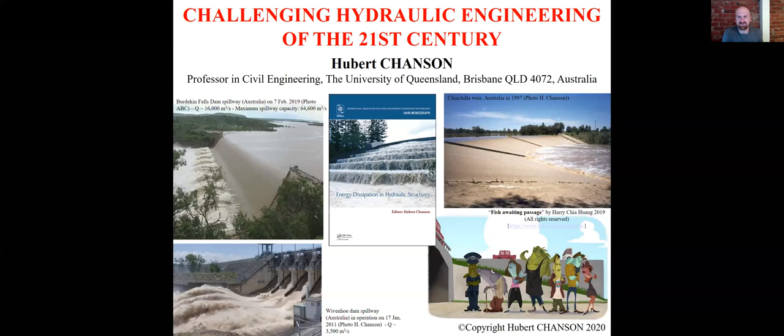This talk has three parts. I will introduce myself and share a few comments about my career, which might be relevant to early career researchers. Then I'm going to talk about what I'm passionate about, hydraulic engineering, and why I'm interested in it. Later, David and Sean will moderate the discussion.

As David mentioned at the beginning, I work in a school of civil engineering, and within the Australasian Fluid Mechanics Society, I think only about 10 to 15% of the membership work in civil engineering. In civil engineering, fluid mechanics is typically applied to water engineering problems. At UQ, in the School of Civil Engineering, our teaching includes hydraulics, fluid mechanics, and hydrology.

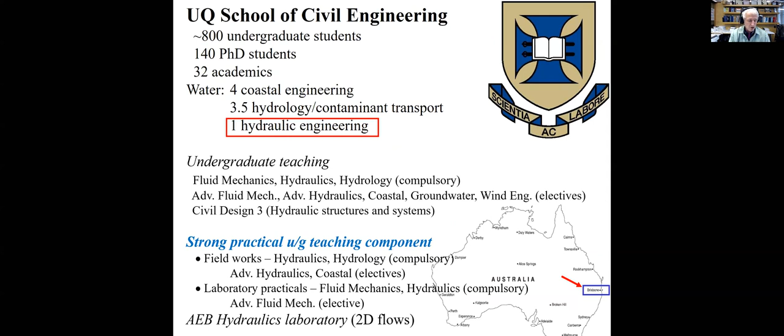A key feature of our teaching of water engineering is a very strong practical component, with fieldwork in two compulsory courses and two advanced electives, and also laboratory practicals in some of our compulsory courses. This is possible thanks to a relatively large and dynamic hydraulics laboratory, which is, in my opinion, the largest teaching and research hydraulics laboratory in the Southern Hemisphere.

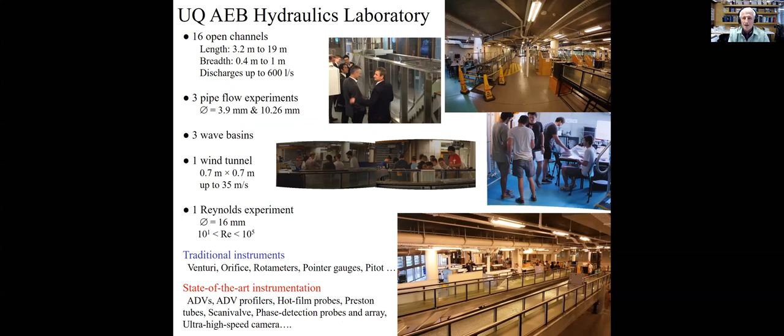I joined the University of Queensland about 30 years ago, after working for nearly 6 years in industry. My research interests include environmental fluid mechanics, hydraulic structures, and two-phase flow. As an academic, my workload is 40-40-20, meaning it should be shared between 40% teaching, 40% research, and 20% service and administration.

That sometimes surprises people, considering that I have published, authored, or edited over 20 books, including some of them that you should see in front of you. In the next four or five slides, I would like to share some experience in relation to research and services.

Administration and services include voluntary contribution to learned societies and peer review. I've been able to contribute to 3 learned societies over the last 28 years, which may include meetings, technical discussions, technical workshops, and organization of conferences, including the forthcoming Australasian Fluid Mechanics Conference in Brisbane at the end of this year.

Peer review is also a necessity in our profession. In the last 15 years, I've been involved as an expert reviewer for over 80 journals. I would like to take this opportunity to encourage early career researchers, but also mid-career researchers, to become more involved in learned societies and in the peer review process.

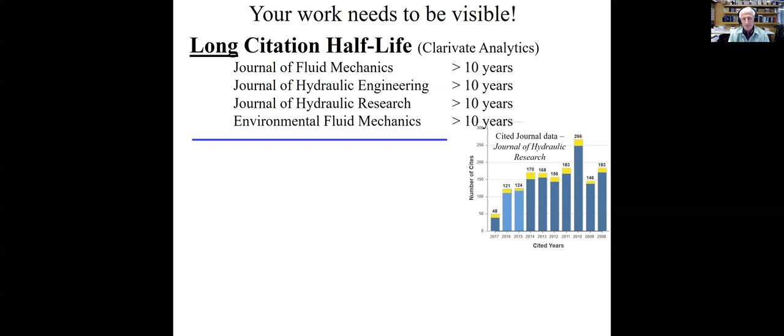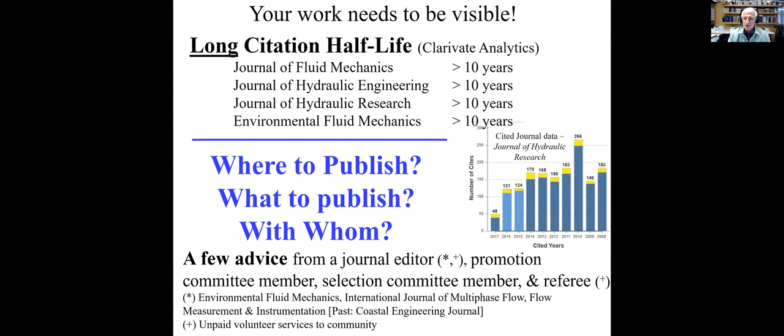So in the next four slides, I'm going to share my own experience, based on data from my own publication record, on where to publish, what to publish, and with whom to publish. First, let's talk about where to publish.

We need, of course, to talk about the IF, the impact factor, or what I like to call it, the insidious fudge factor.

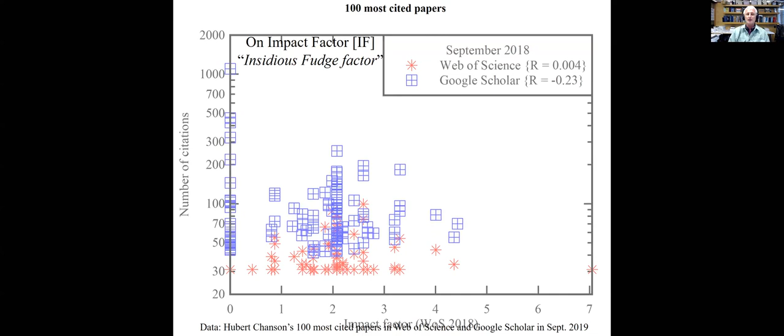If I look at my publication record, I have over 1,200 papers in Google Scholar and around 500 to 600 papers in Scopus and Web of Science. For the next few slides, I'll focus on the 100 most cited papers of my own publication record. This graph shows the number of citations of these 100 most cited papers as a function of the impact factor of the place where they were published, Web of Science and Google Scholar.

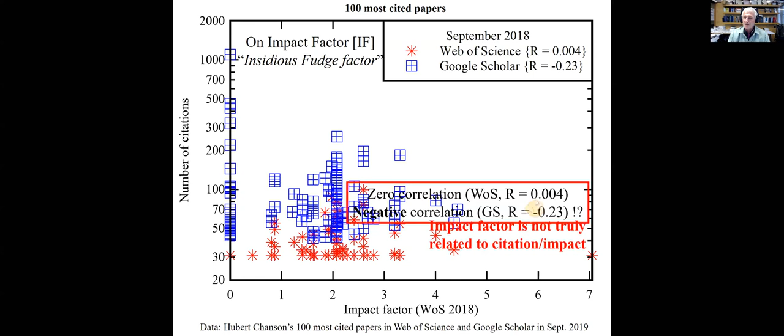What you see in front of you is a nebulous cloud. And if one were to do a regression analysis, there is zero or negative correlation.

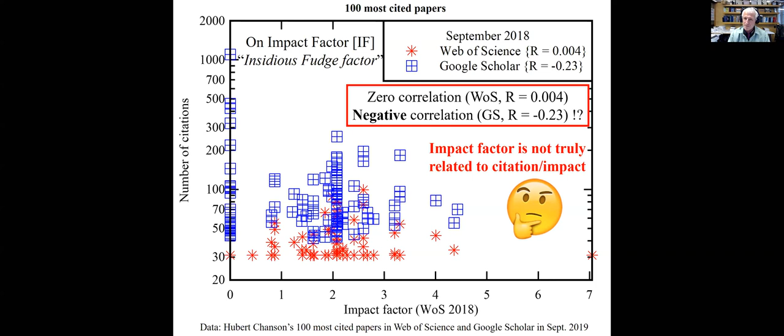Simply, the impact factor is not really relevant to early career researchers because it has been well acknowledged in the bibliometric bibliography that the impact factor is biased. This is clearly acknowledged by Clarivate Analytics, which manages Web of Science.

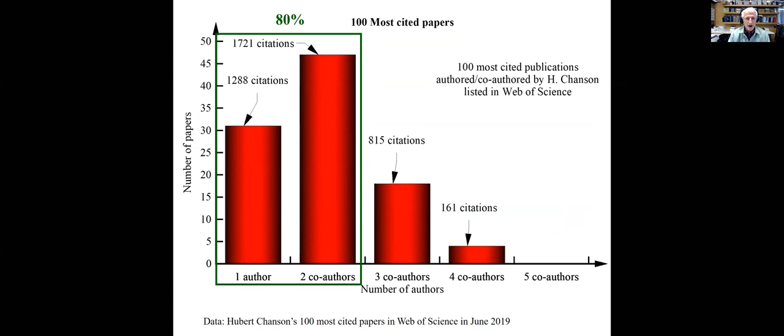Of course, when you ask: should I publish by myself? Should I publish with a couple of co-authors, or with 10 co-workers? For my 100 most cited papers, this is the number of authors. The leftmost column is single-author publications, and yes, I continue to publish as a single author. This year, for example, I've already published 3 journal papers as a single author. But the key message is that my most cited works were either single authored or with one co-author. Publishing with multiple co-authors simply does not attract more citation impact, in my opinion.

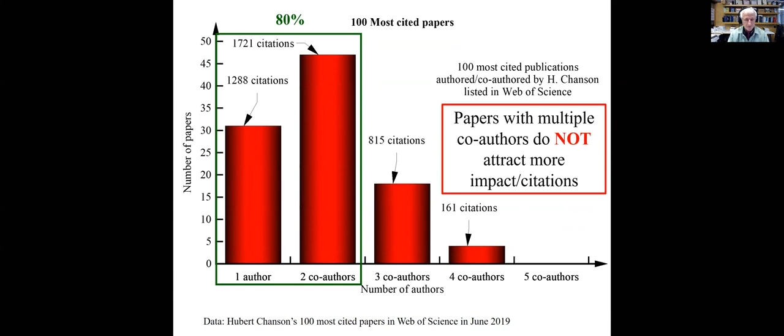But then one may ask, with whom would you publish? International scholars, domestic scholars, students? Again, if we look at my 100 most cited papers, you can see the 4 dominant categories, with a couple of comments. First, international collaborators: they are professional friends, in fact good friends, most of them, with whom I spent a sabbatical or who came to spend a sabbatical with me. They are not necessarily the leading scholars in their field, but they are people I respect a lot and enjoy working with.

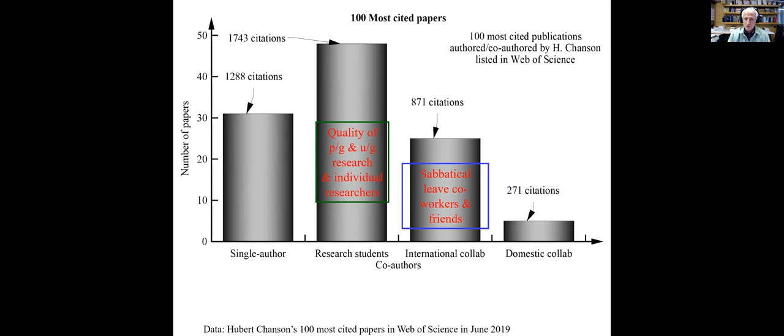But possibly the most important column is the second one, which emphasizes, in my opinion, the importance of student research, both postgraduate and undergraduate. It also highlights the quality of these research students. Based on my experience, co-authoring with international scholars just for the sake of it does not increase the impact of your work.

Maybe I should repeat this slightly differently. The highest impact research is outstanding quality work, published way before anyone else, typically 5 to 10 years before anyone else, in the right places with the right readership.

But let's stop talking about myself, and let's talk about hydraulic engineering. I will start by acknowledging that the following section and slides are very closely related to a plenary keynote I gave last year in Panama, to which two young researchers, Sophia and Hong, contributed. I also want to acknowledge input from a number of other students, former students, young and not-so-young colleagues.

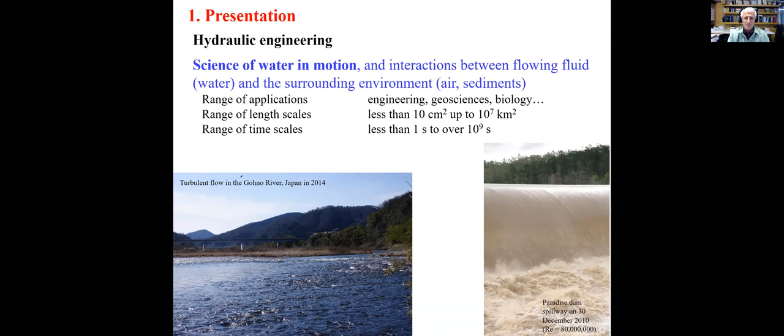What is hydraulic engineering? Hydraulic engineering is basically the science of water in motion and its interaction with its surroundings, air, sediments, with a very broad range of applications beyond engineering. The challenge is that we are dealing with a very broad range of relevant time and length scales, over several orders of magnitude, typically more than 9 to 10 orders of magnitude. This is a gigantic challenge.

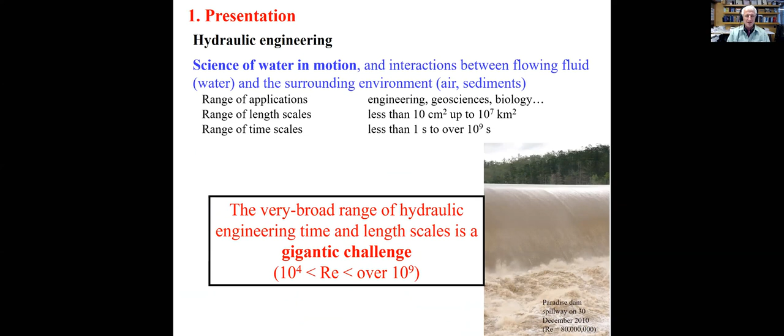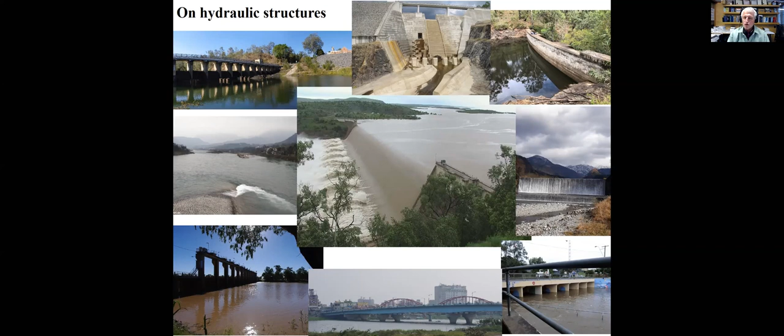It's also a challenge because as professionals, we want to interact with our environment. We want to build hydraulic works across, beside, beneath water bodies in riverine, estuarine, and coastal zones. Our work in hydraulic engineering is usually aimed at 3 main purposes: water storage, water conveyance or transportation of water, and mitigation of the impact of water, for example energy dissipation in a breakwater or mitigation of flooding in an urbanized area.

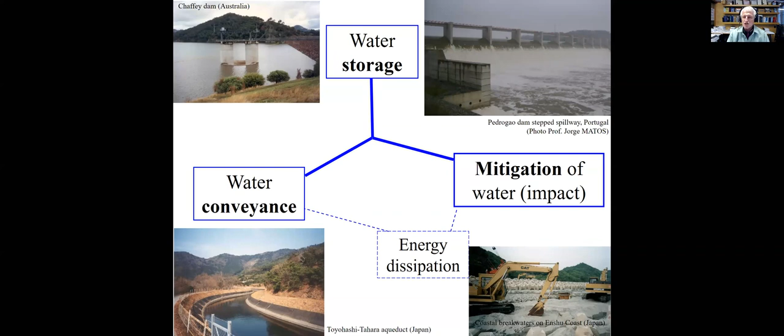Interestingly, the development of hydraulic engineering has been very closely related to the birth of civilization, because life on our planet cannot be sustained without water. In turn, there have been superb hydraulic engineering heritage works, for example this Roman bridge on the Gardon River in southern France. That bridge has experienced nearly 125 major floods in the last 600 years. During its construction of about 20 years, and its operation by the Romans for nearly 300 years, it did experience major floods, and the bridge was designed with smart sediment scour mitigation structures.

But it's not just a bridge. At the top of the third tier of arches, there's a water canal, an aqueduct. It's the Nîmes aqueduct, linking the township of Uzès to the city of Nîmes, in operation for 300 years, with a section of the aqueduct still in use at the beginning of the 20th century.

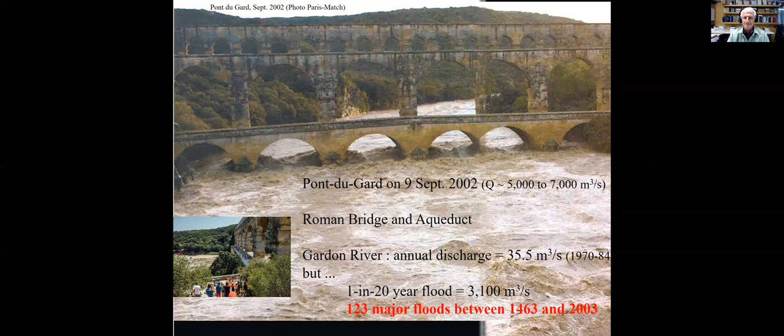Possibly the most important hydraulic works have been the underground great sewers beneath Berlin, Paris, and London, which brought, in the 1850s, modern water sanitation and public health to our community, something that is basically regarded as a human right by the United Nations.

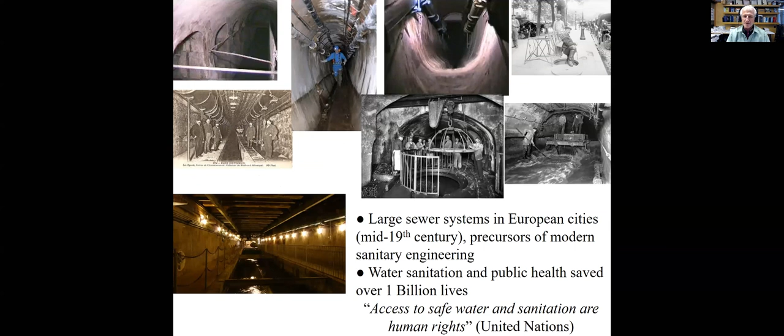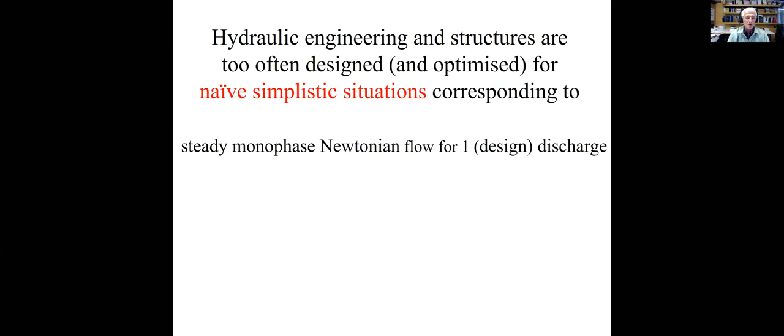But despite these success stories, there are arguments that hydraulic engineers are becoming complacent, that sometimes hydraulic engineering is too simplistic and too naive by developing equations based upon one-dimensional, steady, monophase Newtonian flow, optimized typically for a single discharge. Let's look a little bit at this. Is it true that we are becoming complacent?

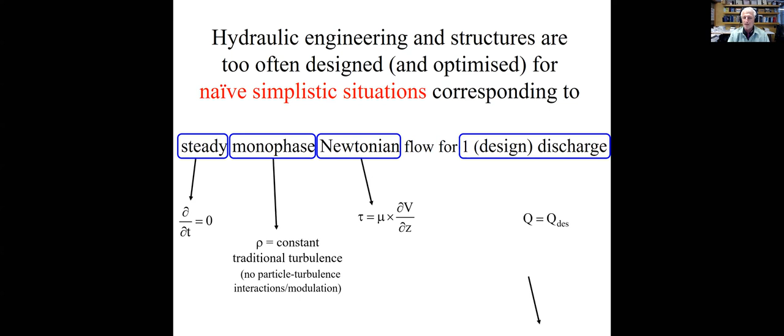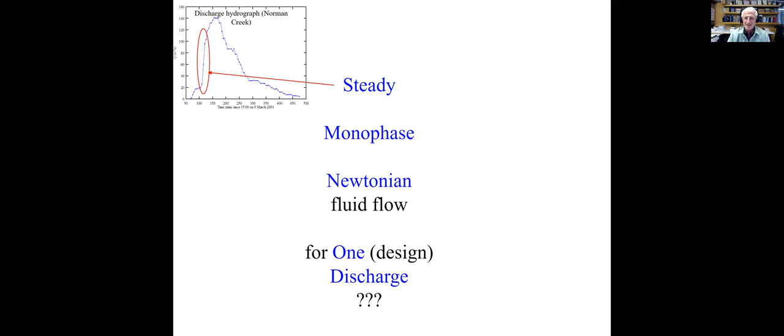When we have a river course, like for example Norman Creek in Brisbane, when a flash flood increases the discharge from 10 cubic meters per second to 120 cubic meters per second in barely 10 minutes, clearly we cannot assume the flow to be steady.

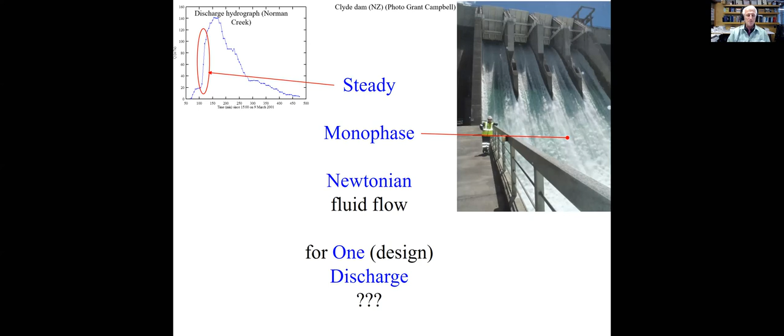Similarly, when we have these white waters in the Clyde Dam spillway in New Zealand, downstream of the bottom spillway aeration device, we have a mix of nearly 50% air, 50% water. Again, in this case, an assumption of monophase flow will not be appropriate.

In January 2011, together with my good friend Professor Richard Brown, we did some measurements in an inundated street of the city of Brisbane, and we collected sediment, typically between 10 to 50 microns in size, with suspended concentration in excess of 100 kilograms per cubic meter. With such hyper-concentrated flow, it is well known that the fluid flow will behave as a non-Newtonian fluid flow, and yet all the current flood modeling of the Brisbane River ignores this aspect.

And how about optimizing a hydraulic structure for a discharge if it fails for 20% of the design discharge? In fact, we need to come back a little bit more on this. How about designing a structure for a design discharge which will become outdated at some stage?

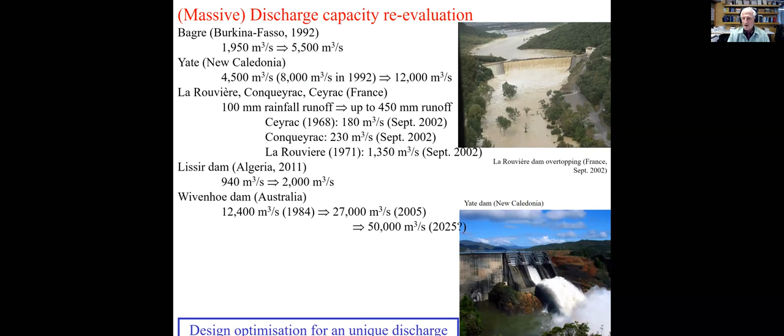If we look in particular at spillway systems worldwide, there has been a massive re-evaluation of the discharge capacity. For example, near Brisbane, the Wivenhoe Dam was built to pass 12,000 cubic meters per second. The spillway capacity was increased to 27,000 cubic meters per second 20 years later. And right now, another 20 years later, we are talking of enlarging the discharge capacity to 50,000 cubic meters per second, doubling the design discharge every 20 years. That's quite a fair lot.

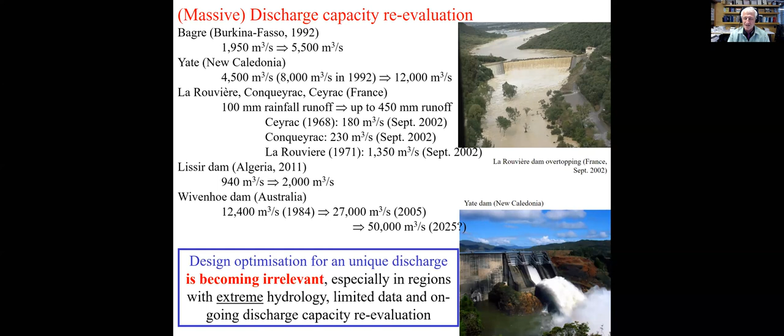So this is one of the challenges in hydraulic engineering. We have massive challenges, and there are some that we still don't know how to solve.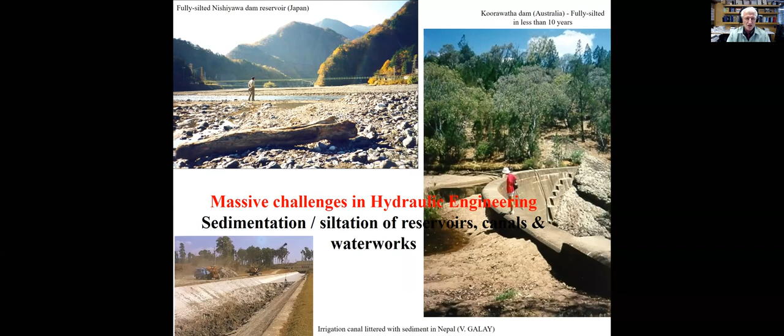Reservoir sedimentation is one. In front of you, the two top photographs in Japan and Australia show two reservoirs which became fully silted in 10 years. While there has clearly been a lot of work on this, with some people like Scott and Bruce, for example, who are very active on this topic, this remains, and has been for more than 2,000 years, a massive challenge.

At the same time, I'm going to talk about two success stories, in the sense that fluid mechanics has been able to bring some new insight into this field. First, talking about self-aeration and hydraulic structures. On the left-hand side, you have a hydraulic jump at the bottom of a dam spillway, and you can see that the water surface is white and brown because of mixing between air and water. Here, this hydraulic jump is dissipating energy at a rate of 2.1 gigawatts when I took the photograph, and that was only 10% of the design discharge.

On the right-hand side, this is the Three Gorges project in China. I took this photograph from the top of the dam. This jet has dimensions of 7 meters by 8 meters, and the velocity at the nozzle is 35 meters per second. You can see that the water is completely white because of the mix between air and water.

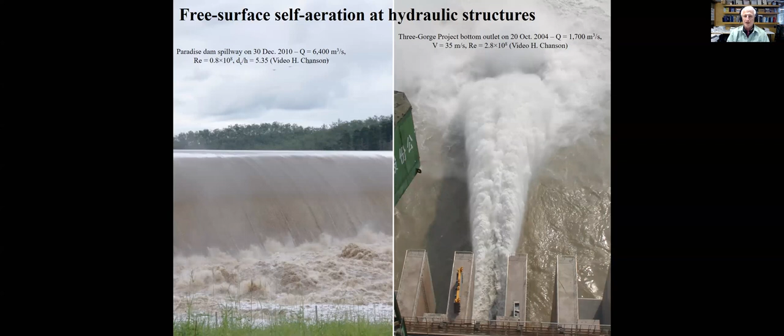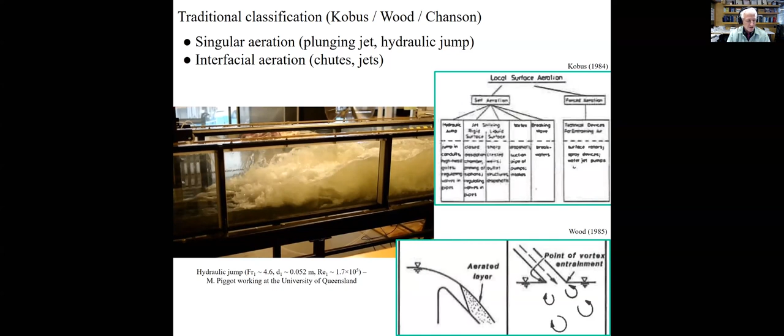In hydraulic engineering, a fairly important development has been the work of Professor Kobus and Professor Wood, who have been able to show two dominant families of aeration: singular aeration, like in the hydraulic jump in this video, and interfacial aeration. But even this approximation or approach is an oversimplification. If you look here at this slide of the entrainment in a spillway, apologies, I hope you can still see it, I'm looking at myself.

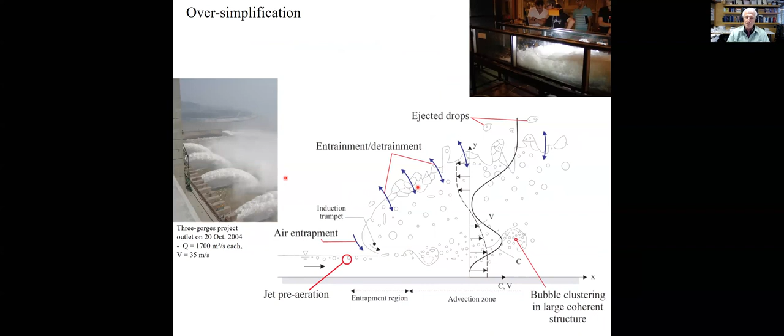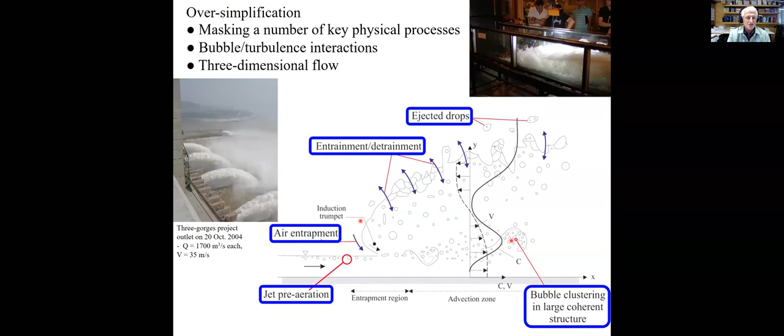We have singular aeration right here at the entrapment point, but we also have interfacial aeration through entrainment and detrainment at the roller surface. And we have complicated interaction between entrained air bubbles and turbulent structure, including bubble clustering. In addition, the flow is not two-dimensional as illustrated here. We have very strong three-dimensional processes.

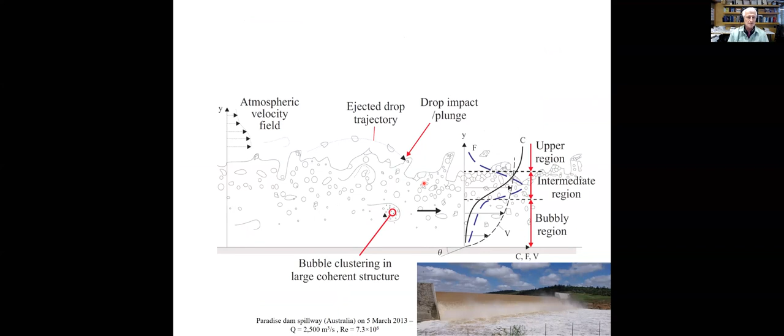Similarly, if we look at the flow down a spillway chute, we have a complicated topology of the two-phase flow, with a bubbly flow structure in the bottom part and, in the upper part, more like a spray region, with in between a very complicated intermediate region that we still don't understand. We also have very dynamic interfacial processes with breakup, coalescence, rebound, and collapse. All this being quite a challenge.

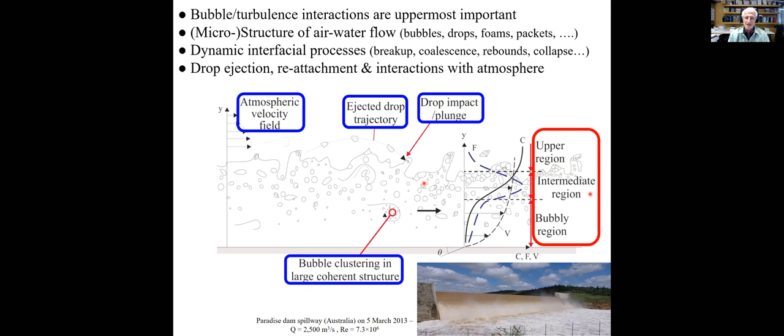From a professional engineering perspective, a key parameter is the inception of air entrainment—when does aeration start to take place? It's important not only in hydraulic engineering, but also in the food processing industry and in chemical engineering.

Building on some seminal work by the late Professor Alan Ervine, I've been able to show that the inception conditions are linked to the inflow turbulence, with a graph first presented in a simplistic way in the 1980s and more recently in dimensionless form. This shows that for a water jet discharging vertically, we have an inception velocity of about 5 meters per second in a pseudo-laminar flow, dropping down to 1 meter per second in fully rough turbulent jets.

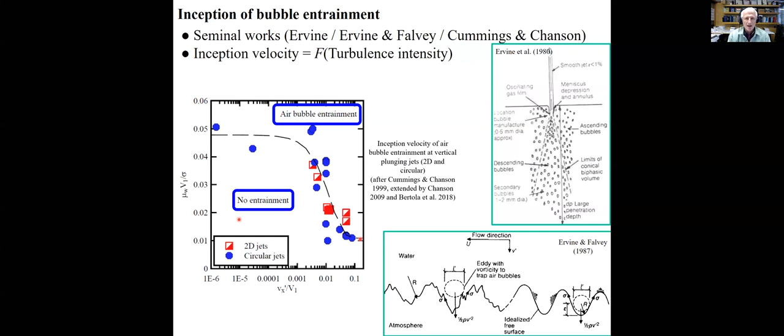But even such a development is still an approximation, because more recent work has shown that the inception conditions are linked to a threshold in the tangential stress in the liquid carrier next to the free surface. In turn, one can develop a theoretical solution of the inception condition as a function of bubble shape, bubble size, and the radius of curvature—one such simplistic solution.

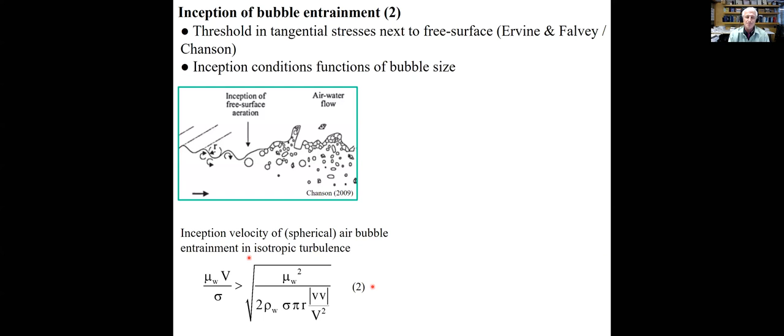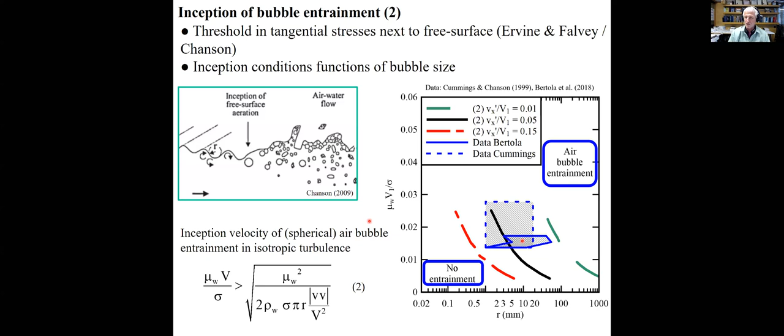How does it compare with experimental data? Here, the inception condition is shown on the vertical axis as a function of the radius of curvature, with the thick line being the analytical solution and the dashed area being experimental observation. While qualitatively the agreement is reasonable, you can see we have a much broader range of entrained bubble size than predicted. This applies not only at the inception condition, but more broadly over a wide range of flow conditions. So we are progressing, but we still have challenges.

Physical modeling needs to be done in large-size physical facilities. On the right-hand side, you see one of my former students and colleagues, Dr. Gangfu Zhang, doing experiments in a large flume using fishing wading trousers. In some other experiments, we may have to equip our students with wetsuits.

CFD modeling can bring further information, but as clearly shown by colleagues like Fabian Bombardelli and Pierre Lubin, validation remains a weak link. There have been interesting developments in metrology, instrumentation, signal processing, and signal analysis, but we are still lacking field observations.

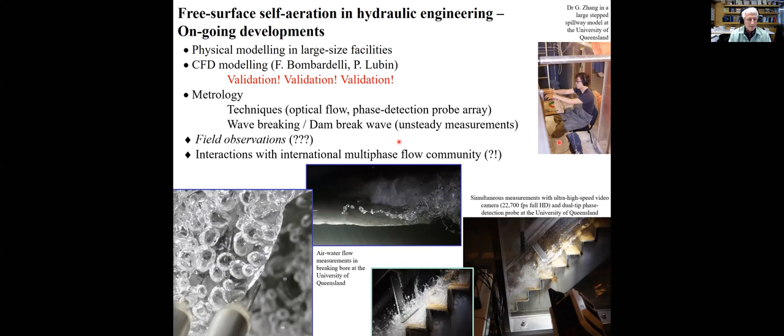Let's look at another challenge: fish passage at road crossings. Culverts are among the most common civil engineering structures. Every day, if you go to work or take public transport, you will pass over at least half a dozen culverts. They are characterized by a very broad range of shapes and designs—these pictures were taken in Europe, North America, and Australia.

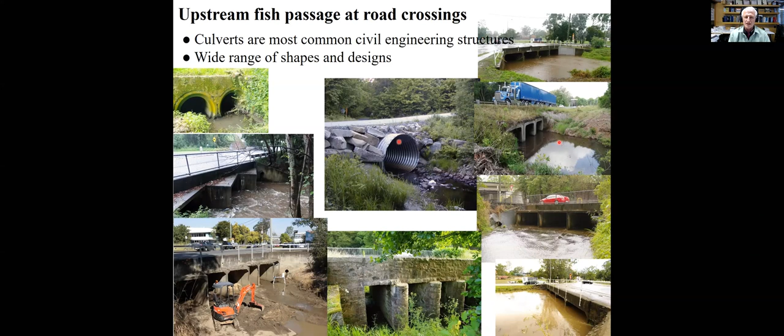In the Australian context, one of the challenges is dealing with a very broad range of flow conditions, from drought to gigantic flood. Most of our culverts, in their narrowest part—like right here at the entrance—will typically operate with a cross-sectional average or bulk velocity well in excess of 1.5 to 4.5 meters per second at design discharge. Keep in mind this order of magnitude: 1.5 to 4.5 meters per second.

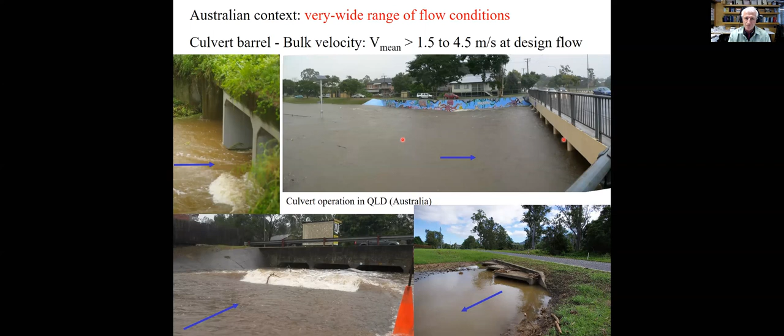It has been recognized for the past 4 to 5 decades that culverts adversely affect fish passage and fish migration, especially upstream passage, for a wide range of conditions linked to lack of light, perched outlets, and standing waves at the inlet or outlet. This interest was initially linked to commercial fish species—trout, salmon—fish which are strong swimmers with a sprint speed well in excess of 3 to 4 meters per second.

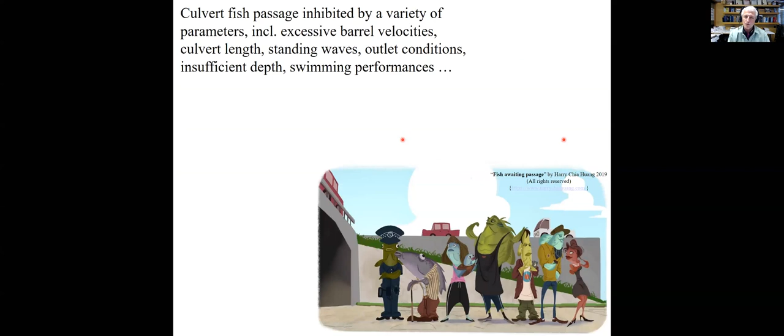But in the last 2 to 3 decades, there has been growing interest in small body mass native fish species and juveniles of larger fish.

In front of you, you have a photograph of 4 Australian small native fish. These fish are typically 100 to 150 millimeters long maximum, with a swimming speed of less than 0.3 to 0.8 meter per second. They are weak swimmers, and for these fish, the excessive barrel velocity is the main hindrance.

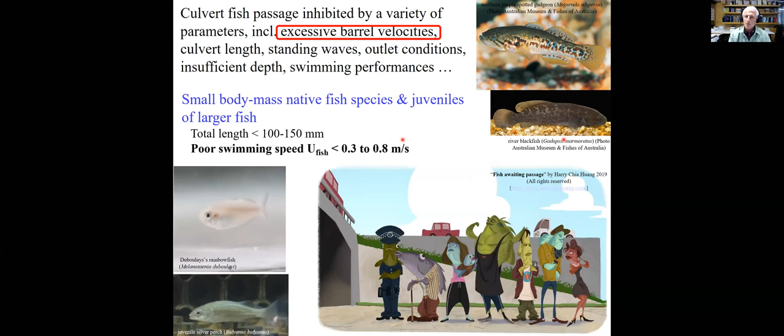So what can we do about it? We can spend some money. On the bottom photograph here, it's a culvert which has been retrofitted north of the Gold Coast at a cost of $130,000. That's very expensive, almost the cost of a brand new culvert. And in this case, they had to reduce the discharge capacity.

In fact, if we look at it in a broader context, for Queensland alone, the retrofitting of the state-managed culverts which need to be retrofitted for fish passage, at this cost, will cost the community in excess of $5 billion. That's quite a lot of money.

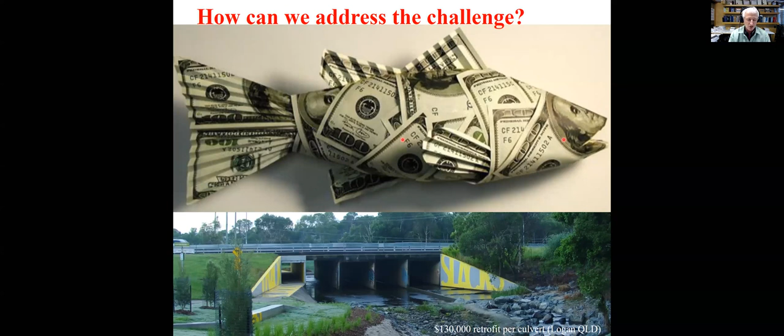I think one of the problems is that we currently are working in a context where many guidelines were developed by biologists with a complete ignorance of basic engineering. And we, engineers, professionals, researchers, academics, need to be much more proactive.

In that context, I had the chance, together with some colleagues, to work on fish passage in culverts for a research project that involved swimming with fish. What you see in front of you is a photograph of a small fish, 76 millimeters long, swimming upstream against the current in a channel which is 12 meters long, 0.5 meters wide. It's basically like a small culvert barrel at full scale.

Hopefully you should start to see the video starting. It's a slow motion video, replayed at 1/8 of the normal speed. Through the observations that we did, we made 2 discoveries, something that puzzled many people, but that we have been able to confirm many times.

First of all, the small fish don't swim next to the bottom. They swim next to the sidewall and in the bottom corners, something that we presented at the Australasian Fluid Mechanics Conference in Perth. The second thing you can see from this video is that this small fish is not sprinting. It's swimming very slowly, trying to keep its energy.

With another fish species, you have on the bottom graph here the trajectory of the fish, which over 15 minutes has progressed upstream by barely 4 meters. We have observed fish which have taken anywhere between 1 minute to well over 20 minutes to pass a 12-meter long channel. This result, initially obtained with Australian fish species, has since been confirmed with other small body mass native fish species from North America.

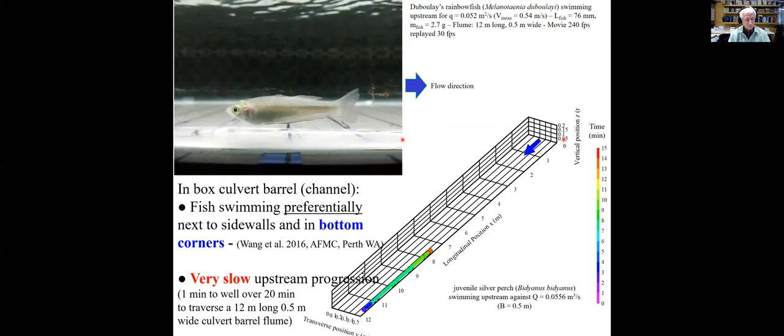But of course, every time we do laboratory work, one needs to query whether our laboratory work, whether in a large channel like here, or on the bottom like this tube test typically used in biology, can be extrapolated to full scale, like this full scale culvert that we see on the bottom left of the slide.

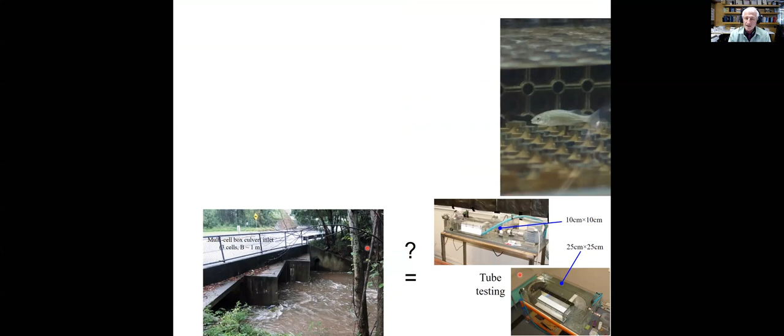There is a classical approach, which is to perform dimensional analysis. If one looks at dimensional analysis for a fish swimming upstream in a rectangular box culvert, we obtain a series of dimensionless relationships linking the fish swimming speed fluctuation, oxygen consumption, and fish response time as a function of the location within the culvert, the fish species and dimensions, the boundary conditions including the size of the culvert, and the turbulent flow properties.

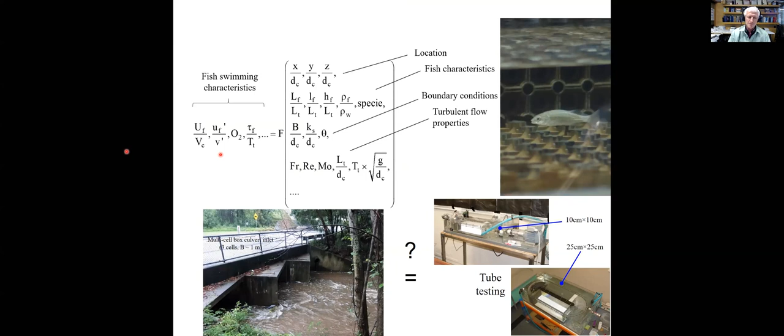We note, as fluid mechanics experts and mechanical engineers, that laboratory work can be extrapolated to a full-scale structure if all the key dimensionless parameters are the same in model and prototype. When we use fish species in laboratory at full scale, as everybody does, we need to ensure that the ratio of fish dimension to turbulent length scale, and fish response time to turbulent time scale, are the same.

This implies that any small testing, like the small tube testing, is irrelevant because it cannot be extrapolated to full scale. And that is bad news.

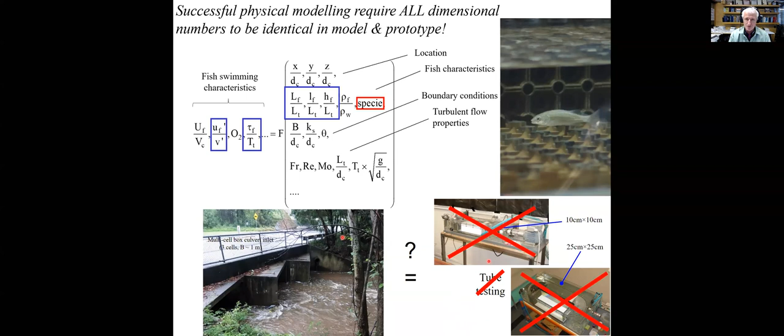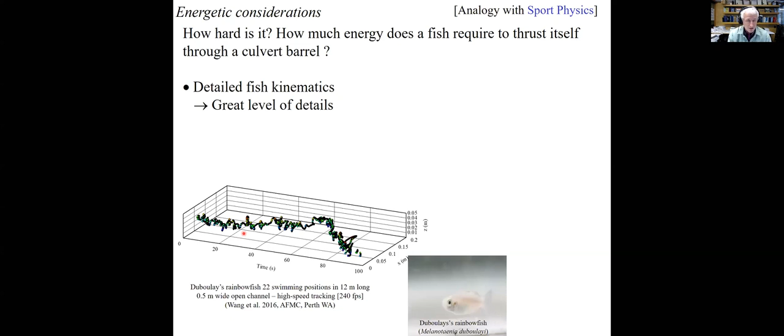On the other hand, one could develop an analogy with sport physics. How hard is it for a fish to swim upstream? How much energy does the fish require to thrust itself? Particularly when we have detailed fish kinematics data, like this graph which was presented again in Perth in 2016, we can develop theoretical considerations showing that the rate of work spent by the fish is directly proportional to the cube of the local velocity.

And here the key word is local fluid velocity. We are no longer talking about a bulk or cross-sectional average velocity, we are talking about the local velocity. In turn, we can understand why the fish are swimming in the side wall and bottom corner: they are simply seeking a low velocity zone, a sizable low velocity zone.

So in turn now... oops.

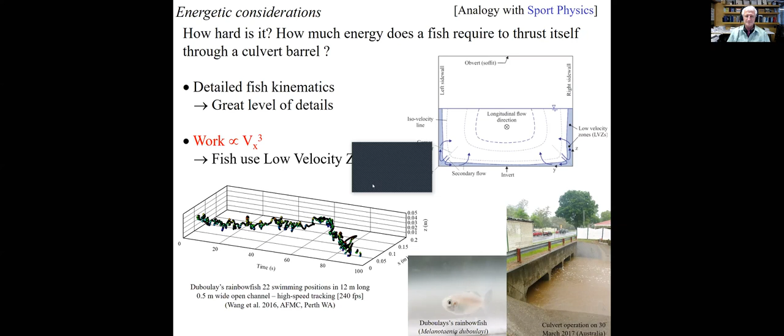Just bear with me, I seem to have a small problem. I lost control of PowerPoint. Murphy's Law. Apologies, everyone. My PowerPoint, yes, here it is.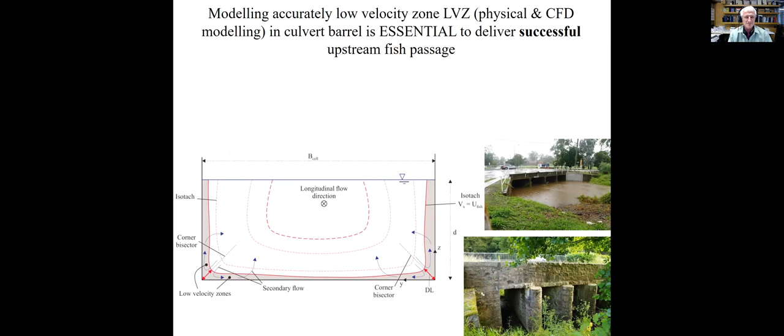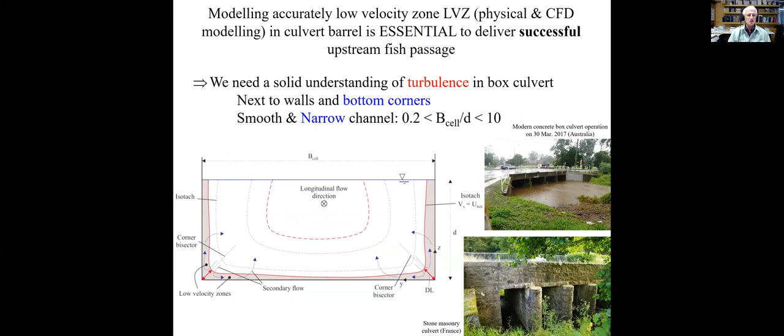So practically our problem now comes in modeling accurately the low velocity zone to ensure successful upstream fish passage. And that is quite a challenge, especially in hydraulic engineering, considering that it will require a fairly good understanding of turbulence in regions near the sidewall and in the bottom corners that were traditionally ignored in hydraulic engineering. So to sum up a little bit, fish response to turbulence is not trivial, but is directly relevant to the design of fish-friendly structures.

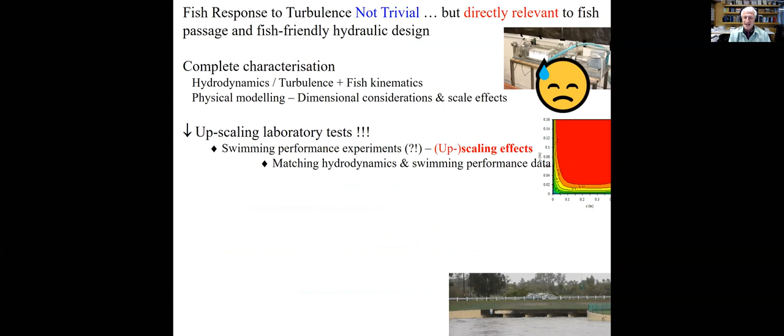It requires a complete characterization of turbulence and fish kinematics, something that has rarely been done. To the best of my knowledge, there have been 3 studies doing it, and one of them is ours. Clearly, upscaling small laboratory tests is a major challenge, but using an analogy with sport physics, we can demonstrate that an accurate characterization of the low velocity zone will enable us to develop physically based fish-friendly design.

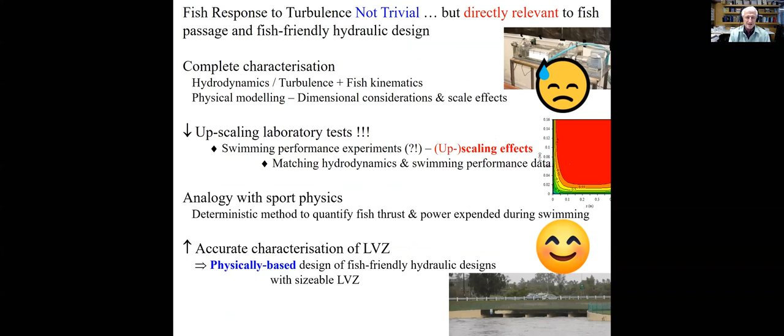So let me conclude with a couple of slides. Hydraulic engineering and floods are not new. Floods of the Nile River have been recorded for 8,000 years. There have been hydraulic engineering books by Frontinus, Vitruvius, but also, importantly, Hero of Alexandria, nearly 2,000 years ago. Open channel hydraulics, truly speaking, is a fairly mature field. Most of our modern textbooks, including my own textbooks, are very closely related to lecture notes developed by Professor Bélanger and Professor Bresse in the 1850s at the École des Ponts et Chaussées.

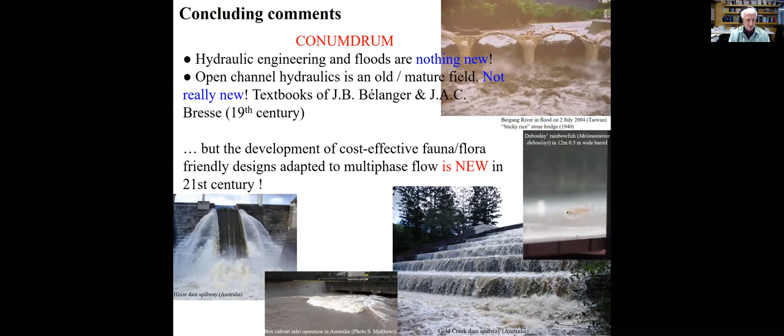But the development of cost-effective, fauna and flora friendly design adapted to multi-phase flow is clearly something brand new as we are moving into the 21st century. And as a professional engineer who continued to work on an ad hoc basis as a consultant, I have seen a shift in development in hydraulic engineering.

Traditionally, we develop our design with a naive, simplistic optimization based upon one-dimensional, steady, monophase, Newtonian fluid flow, optimized for a single discharge, an approach that was very common during the 19th and 20th century, an approach which would work very well for design with a proven track record. Why make it complicated if we can do simple with a proven track record?

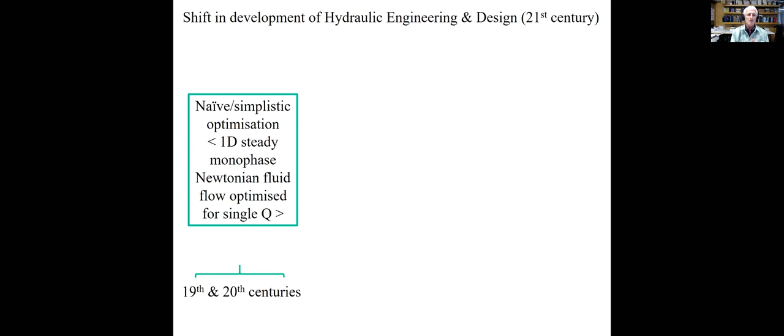But at the same time, we see also the introduction of more advanced methods for modern design, using combined or hybrid modeling, for example, physical and CFD modeling, theoretical and fieldworks, which of course in any case require validation, something that is a very weak point, particularly in our Australian profession. Interaction between particles and turbulence is an interesting challenge. Turbulence on flora, turbulence on aquatic life. And of course, we need to optimize our design for a broad range of discharge.

Let's take the last example of fish passage in culverts. We don't optimize a culvert for fish passage for one single discharge. We want fish passage to occur for a broad range of discharge, typically 95 to 98% of the time.

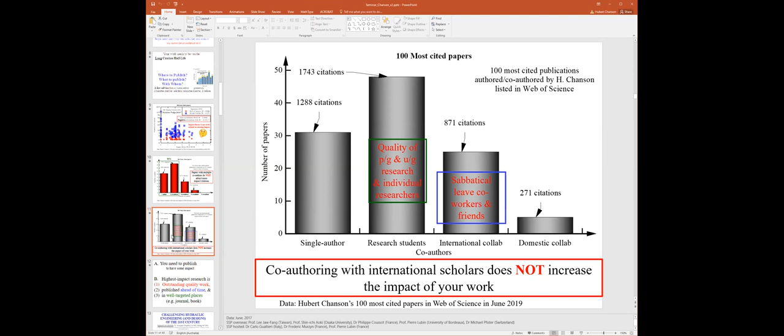Okay, thank you. Did we have any other questions for Professor Chanson? I have a question if no one else does. Thank you very much for the talk. It was very interesting. We're sort of getting a flavor of a lot of different things in fluid mechanics from these four seminars that we've had in the past month.

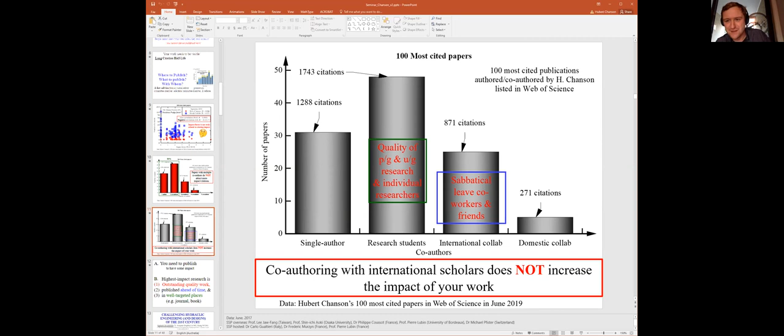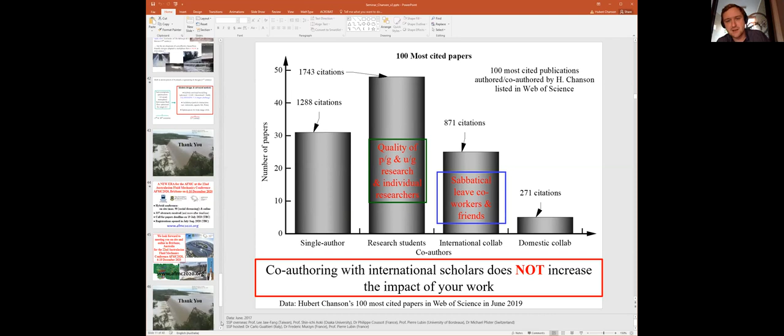I had a question. So in your conclusion slide, there was some reference to field measurements, I think. And I remember seeing a talk by, I think, your colleague, Professor Richard Brown, about Lagrangian data assimilation in the Brisbane River, if I'm not mistaken. So I'm wondering if you can comment on some of the work that's being done to combine field measurements with CFD modeling of these complex flows.

And we therefore have field data sets which are either very coarse. For example, using an ADCP or a current profiler, we can get the velocity profile within a few minutes at different locations, but no information on the velocity fluctuations or any turbulence characteristics. Or you need to deploy a few instruments at a fixed location that you sample at high frequency, for example, 200 Hertz with some of the ADVs, for a relatively long period of time.

Again, the Brisbane River is a tidal river, so the flow direction changes twice a day with the tide, and hence you need relatively long duration, high frequency data sets, which in turn bring very large data sets, although they are only point measurements. So the challenge there is that in a system like the Brisbane River, it's extremely difficult to characterize everything at once.

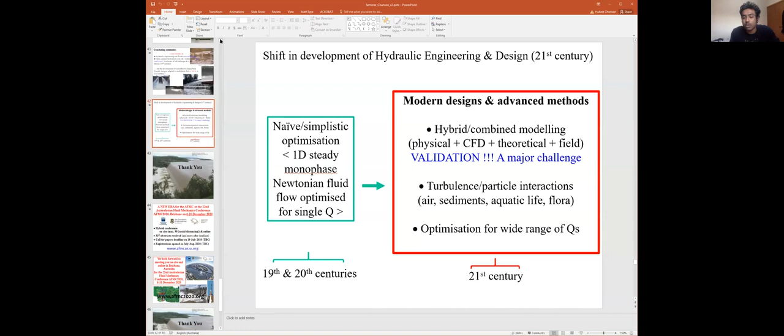Yeah, hi. This is probably a weird question because I'm not that aware of fish locomotion. I'm actually a PhD student at Monash University in mechanical engineering. This is kind of like a 'why did the chicken cross the road' kind of question, because in your talk you discussed fish having to expend a lot of energy when crossing the culvert. I know salmon and some other fish travel upstream, but is it a general phenomenon that fish travel upstream in rivers, or could you comment on that?

Yes. I think fish traveling along a river is a natural process, but depending upon the species and depending upon the family or guild of fish, you will have different behavior. Some fish migrate for spawning and reproduction. Some migrate downstream and reproduce at sea. Some migrate upstream and reproduce inland. Most of the time, especially with small fish, there's also simple migration of habitat.

Basically the fish are simply trying to move to different places, different sheltering places. Even for reproduction, small fish tend to migrate in response to a flood. There are triggers that are not always fully understood, but for most Australian fish it's typically the rising limb of the flood. When the flood starts, the discharge starts to increase, and the fish feel the increase in flow and use this opportunity to migrate, often upstream, sometimes downstream.

Generally speaking, in terms of habitat, most fish will tend to migrate one way or the other between parts of their own natural habitat. Every time you have a culvert that blocks this natural passage, you're going to adversely affect their habitat, or eventually their numbers.

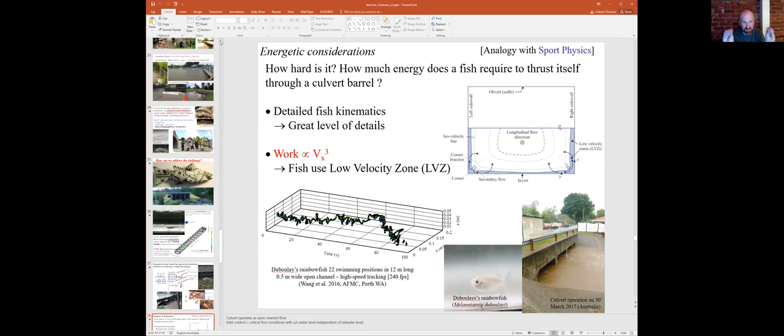Thanks, Hubert, for an amazing talk. On a related question, Professor Chanson, I would imagine naively that over time culverts just build up with sediment around the corners and slowly aggregate towards a parabolic type geometry. Is that it? Is there something cheap and simple that can be done to break up the geometry of the culvert to keep a nice slow boundary layer for the fish to swim alongside?

Look, in front of you, on the bottom right-hand side, you have an example of massive sedimentation of a culvert. Sedimentation is something that is unwelcome in a culvert. As a professional engineer, irrespective of fish passage, you don't want sedimentation because it reduces the discharge capacity of your culvert. Usually, provided your design is sound, you'll find that in the barrel, the narrowest part of the culvert, you have large velocity, and this large velocity basically reduces the risk of sediment deposition or accretion.

So generally speaking, with a properly streamlined culvert, sedimentation is not a major issue. A greater issue, somewhat relevant to what you mentioned, is debris. When we talk about a box culvert in relation to fish passage, the bottom corners are the ideal place for small fish to migrate. But when rocks, branches, and large debris start to block the culvert or these bottom corners, the structure can no longer be fish friendly. Unfortunately, there's not much you can do except, as you can see in this bottom photograph, bring an excavator or bring people to clean up the culvert.